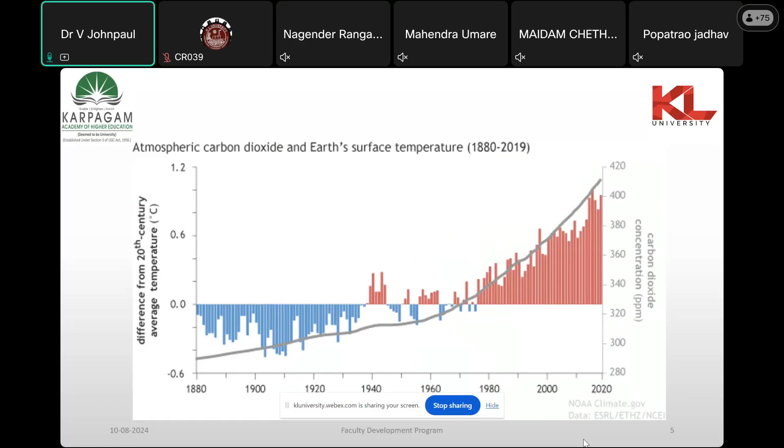These are some of the innovations and future directions which we are recently looking for: net zero energy buildings, circular economy approaches, biophilic designs, advanced materials and technologies, smart buildings and IoT integrations. This fifth one, smart building IoT integrations, is the recent one we started to implement in civil engineering also, like using drones or sensors for health monitoring, etc.

Based on this, Indian specific initiatives have organized Indian Green Building Council, IGBC, Indian Energy Conservation Building Code, ECBC, and Sustainable Habitat Mission. Then green rating for integrated habitat assessment.

So what is meant by green buildings? It refers to a structure that is environmentally responsible and resource efficient. That is very important. It has to be both environmentally responsible and resource efficient.

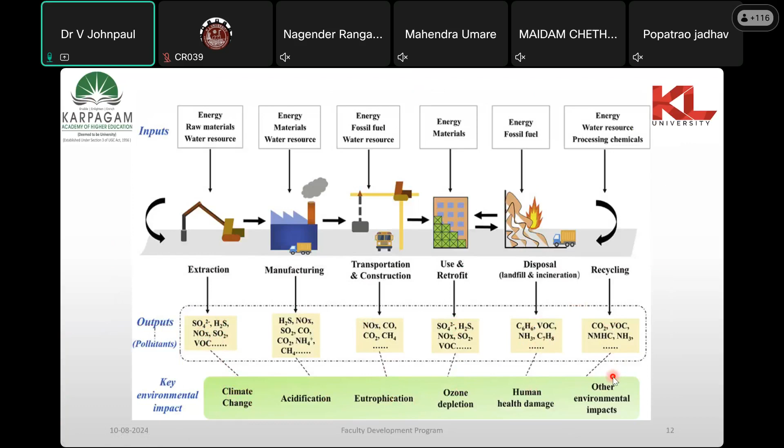That's why we are looking into green building materials, which are a perfect alternative to traditional concrete materials.

We need to optimize material usage to equivalent standard dimensions, and minimize wastage through the waste management hierarchy. Using prefabricated components like precast structures, we can minimize a lot of waste since it's manufactured within the industries.

We need to plan reuse with future deconstruction in mind to facilitate the reuse of materials. As the sir mentioned in the morning session about prefab structures, you can reuse them anytime, unlike concrete structures where we need to demolish and dismantle, causing huge loss in materials and money. Whereas in prefab structures, we can go for modifications, extensions, or replace the structures in other places.

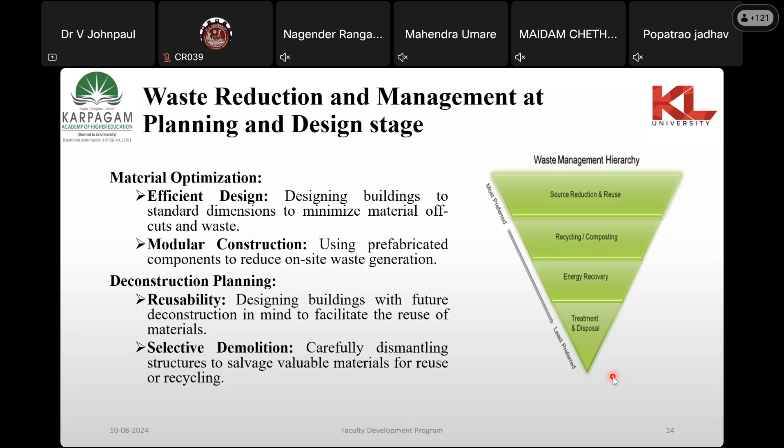These are the certifications and standards for sustainable buildings currently available worldwide. You can get rankings for a green building or sustainable building concept based on energy consumption and carbon emissions. They give ranking systems, especially in India or abroad.

LEED, Leadership in Energy and Environmental Design, has been recognized as a green building council certification in three categories: silver, gold, platinum, under each category covering energy, sustainable sites, water efficiency, materials, indoor quality, and design innovations. In sustainable construction practice, life cycle assessment of the building is very important.

Rather than just talking about sustainable building practices, we are not calculating the life cycle assessment of buildings. I've heard many say that since a metal is going to waste, they incorporate it into the concrete and call it green concrete because they've used waste. But it's not like that - we need to assess the life cycle of the building.

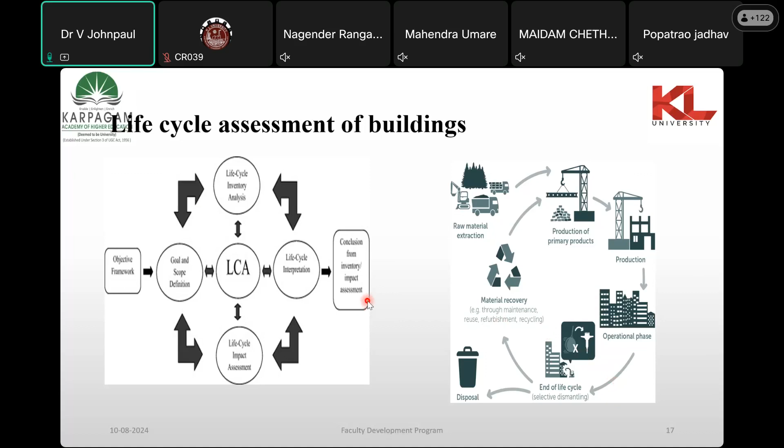So before using any waste material in concrete, you should do the life cycle assessment of that particular building material. That is very important.

There are other standards for sustainable building measurements, such as the international standard for environmental management systems developed by the International Organization for Standardization, and certifications involved in construction. Their focus is to reduce environmental impact and improve environmental performance through systematic management.

These are some of the buildings constructed around the world as sustainable construction projects. The Edge, located in Netherlands, is known for cutting-edge sustainable features and smart technologies. It uses energy efficiency techniques by combining solar panels and energy efficiency systems to achieve high level of energy performance. In India also, we have started to use solar panels.

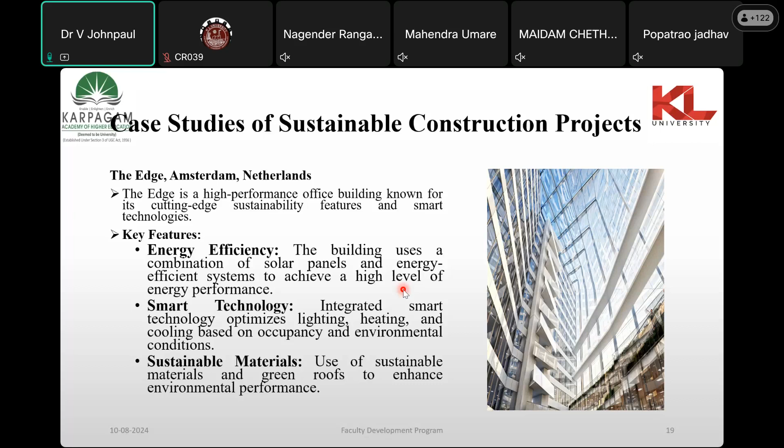Central governments have started to give many plans and schemes to conserve energy. The smart technology they have implemented optimizes lighting, heating, and cooling based on occupancy and environmental conditions. They also use green roofs to enhance environmental performance.

Another example is One Central Park, the building located in Sydney, Australia. It features green walls, and the towers use large vertical garden designs. It was designed by architect Patrick, contributing to improved air quality and aesthetics. Due to the hanging gardens on the wall, they get fresh air.

It also has sustainable design through energy efficient systems, water recycling, and sustainable materials. Even for flushing toilets, a huge amount of water gets drained, even fresh water. For that, we can go for recycled water, which they have adapted in the One Central Park building.

For community integration, the development includes public green spaces and amenities to enhance community interactions. The Green Star has been given by the rating systems to showcase the integration of green infrastructure in high density urban environments.

Now we'll come back to the materials which I have mentioned in the title further, which I have used for my research also. GGBFS, ground granulated blast furnace slag, is produced during the process of iron ore processing. This is one of the byproducts.

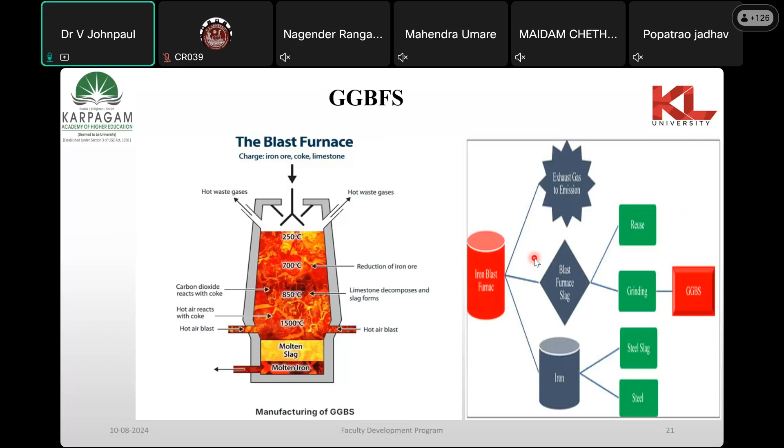It uses iron ore, coke, limestone, which decomposes at 850 degrees Celsius. Carbon dioxide reacts with the coke.

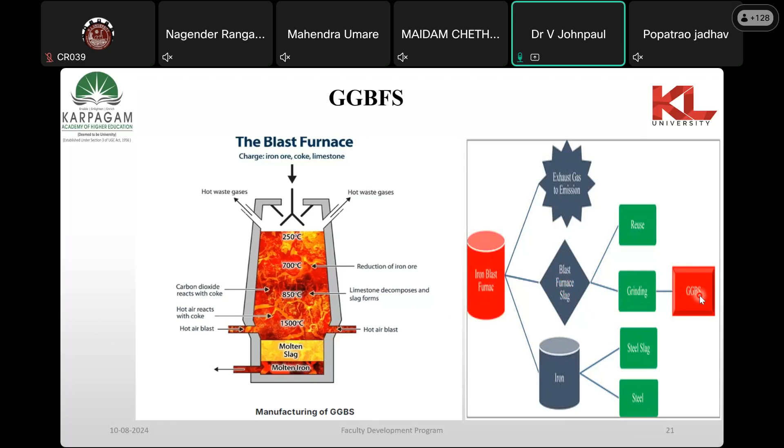These are the chemical compositions of GGBS slag, which slightly vary depending on the composition of raw materials in the iron production process. If you go for Tata Steel plant, the calcium oxide may vary, silica may vary. If you go for JSW, the percentage of chemical composition varies. For that, there is a provision of a code book which I'll show you.

This is the code book, IS 16714:2018. This is the general requirement given by IS codes in table 1, chemical requirement of GGBS. For manganese oxide, MnO, maximum should be 5.5% by mass. The test method is IS 4032.

Magnesium oxide has to be 17% by mass. Loss on ignition has to be 3%. Chloride content, which causes corrosion in the steel, has to be less than 0.1%. Insoluble residue 3%. These are the percentages required as chemical requirements for GGBS.

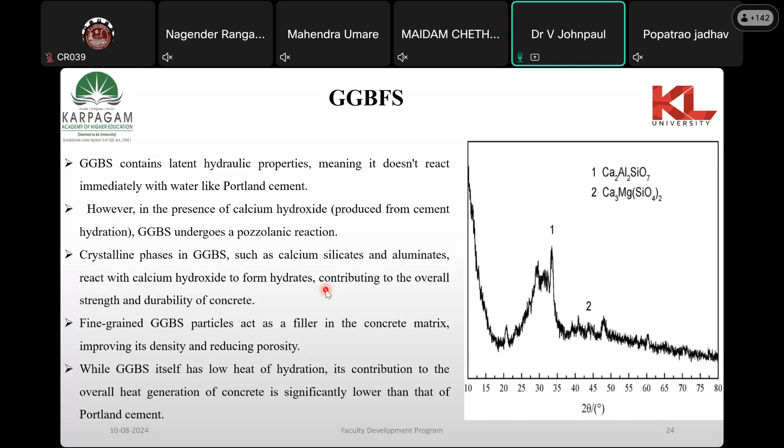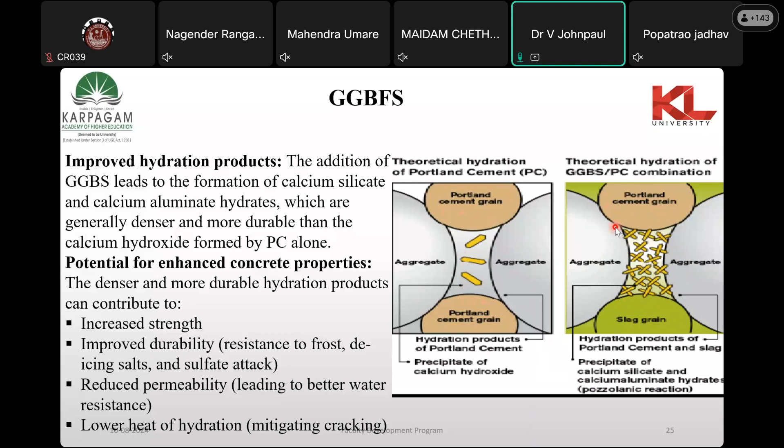Due to the improved hydration reactions, this formation happens in the concrete. If you look into the normal concrete on the left side, there will be porosity. If the porosity is connected, there will be points where water or air can penetrate. If it is RCC, there is a chance for durability constraints because it starts to corrode due to the penetration of air and water.

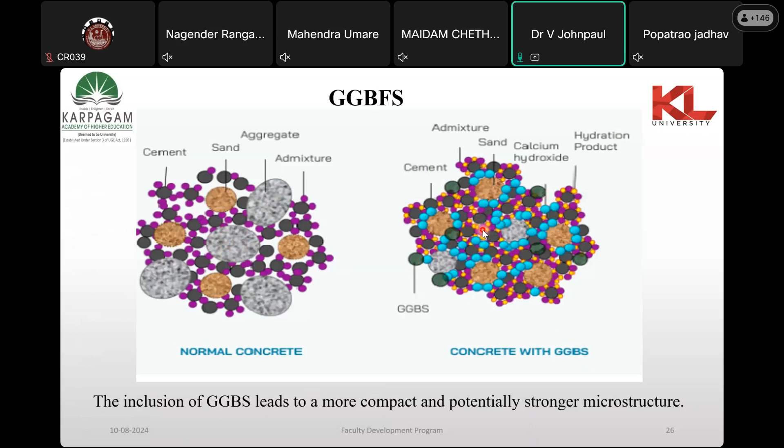And if you look into the picture of concrete with GGBS, there is a closely packed ITZ, interfacial transition zone, because of the hydration products formed during the hydration process. So it's a strong bond.

Now, carbon dioxide capture in fine aggregate GGBS. Mostly in GGBS, I have done research as a replacement for fine aggregate, and also as a replacement for cement.

So due to this, the pozzolanic reactions will be less, and shrinkage cracks will be less. In the long run, like what I said before about life cycle assessment, this provides better solutions compared to other things.

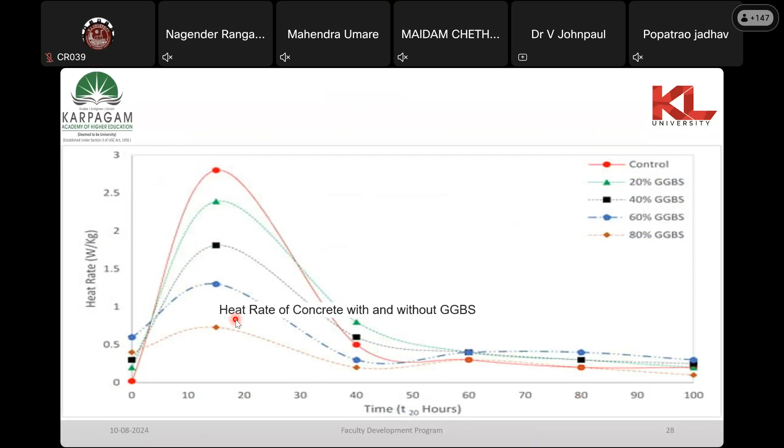Then, looking at curing age and normalized heat flow - if you look into this also, GGBS with curing results in heat flow that is very less compared to the normal.

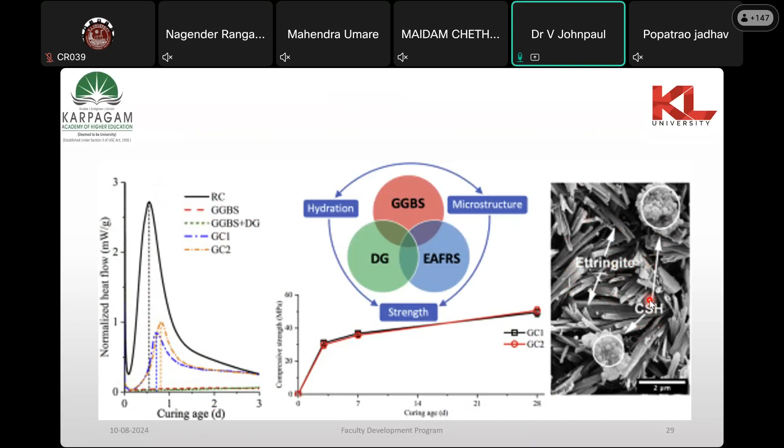Just look into the images - there is a formation of ettringite and CSH, calcium silicate hydrate. You can see through the images. In the next picture, I'll show you clearly: the left one is normal, that is like if you take M20, 1 is to 1.5 is to 3, with 1.5 part fine aggregate and 3 parts coarse aggregate.

Along with this is GGBS incorporated concrete. You can see the formation of ettringite, and you can clearly see the formation of CSH. There is a close bonding between the paste and the aggregate formed during the hydration process. In the long run, this poses benefits - we can reduce landfilling as well as concrete production materials too.

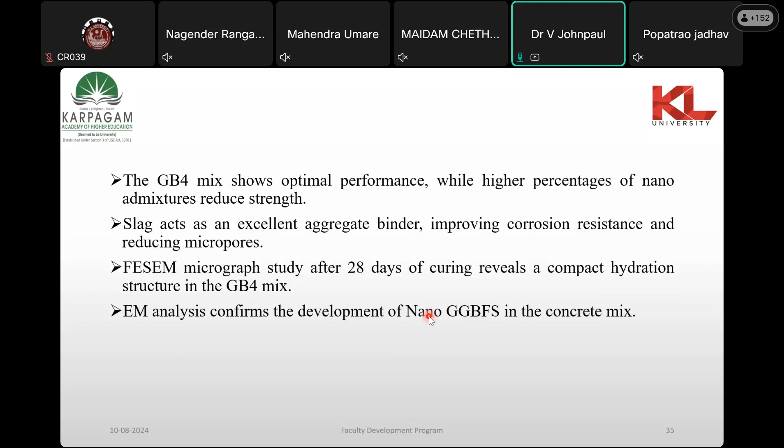Which we have seen, slag acts as an excellent aggregate binder, improving corrosion resistance and reducing micropores. Even many cement companies have now started research on water repellent concrete techniques, even denser than this. Many people have started to research on this so that it reveals a compact hydration structure in the mix, like FESEM, which gives you a clearer image, as you have seen. It confirms the development of nano GGBS.

Leadership in Energy and Environmental Design recognizes GGBFS in concrete as a sustainable practice. Using GGBS can earn LEED points by improving project sustainability. It gives you the green rating, promotes sustainability, improving living conditions and resource management. Construction is crucial for progress, impacting social and economic factors.

Due to urbanization and industrial growth, increasing recycling and waste management challenges, GGBS is beneficial for high quality cement, mortar, and cement production. So these are the major advantages of using GGBS: it has high workability, reduces bleeding, reduced permeability, and chloride resistance, which is very important for RCC so there will be reduced chance of corrosion in the concrete.

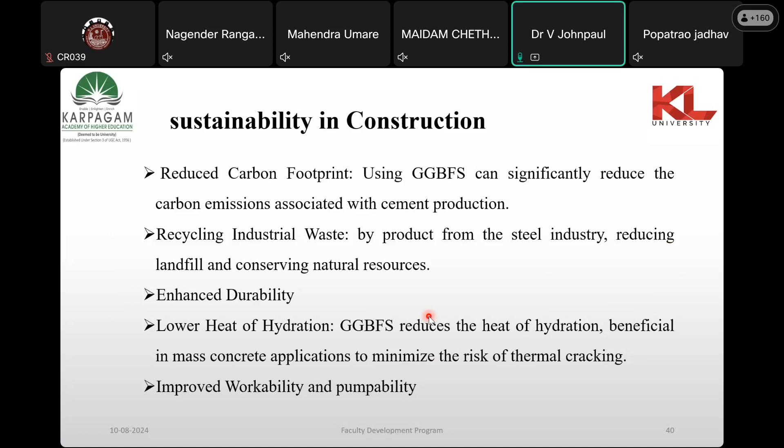It will also enhance durability and reduce the heat of hydration, which is beneficial for mass concrete applications. There is a chance of thermal cracking, like shrinkage in mass concrete, which can be reduced using this kind of pozzolanic activity material, along with improved workability and pumpability in the concrete.

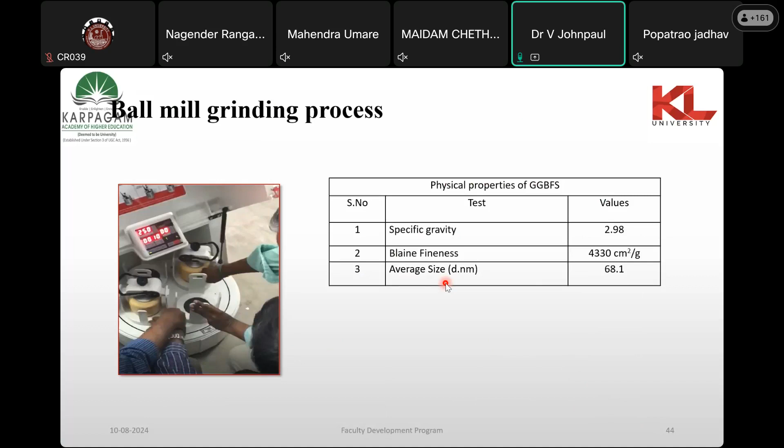This is the fresh properties of concrete. This GB1, GB2 and all mentions the mix type which have been added.

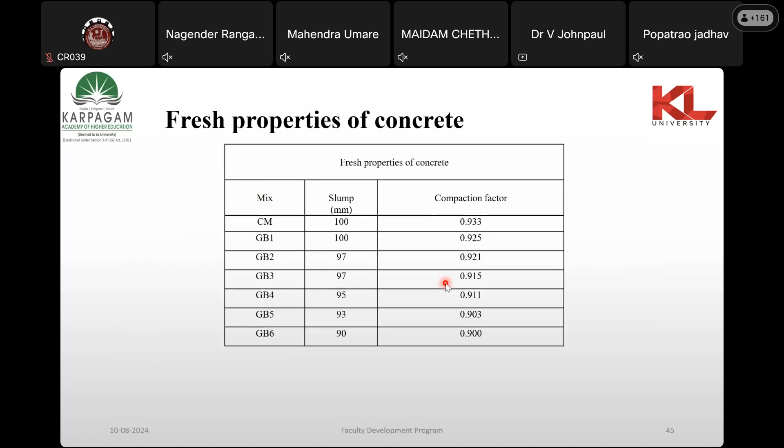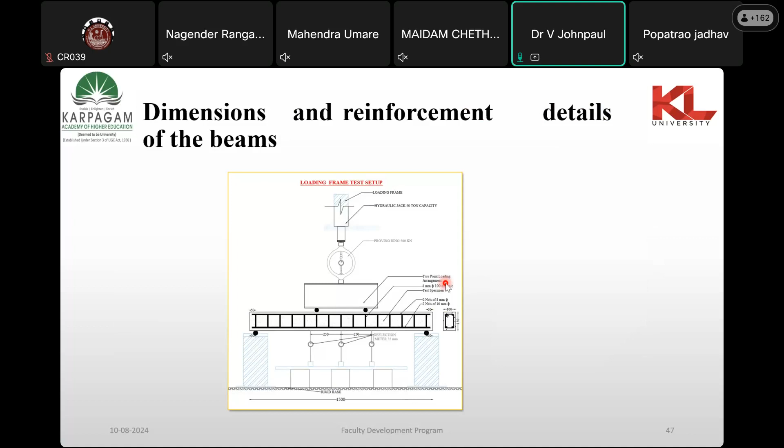Then coming back to the reinforcement details of the beam, which have been 2 numbers of 8 dia at the top and 2 numbers of 10 dia at the bottom, has been cast and tested with different GGBS based different mixes using a loading frame, hydraulic jack of capacity 50 tons, loading frame of capacity 100 tons, and proving ring of 500 kN with 3 jacks at the bottom. One is L by 2, L by 3, and L by 4 with simply supported support connections.

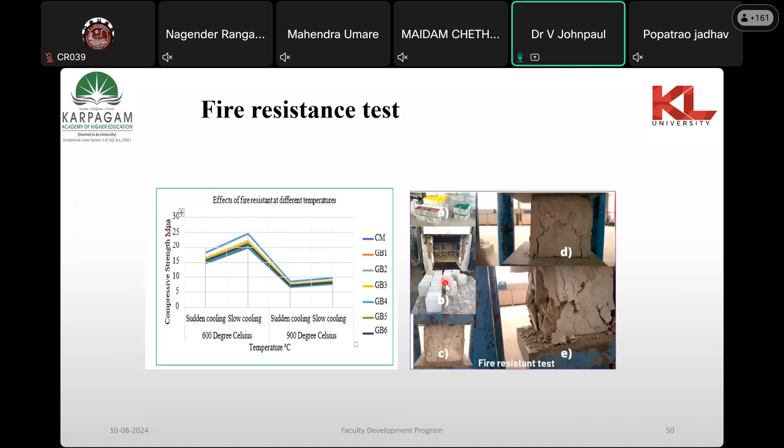The compressive strength, then this is the fire resistance test, which happened to be done for the control mix and the GGBS based mix. Both almost exhibit similar type of properties, but even after going up to 900 degrees Celsius in the oven, it exhibits good strength capacity compared to control mix.

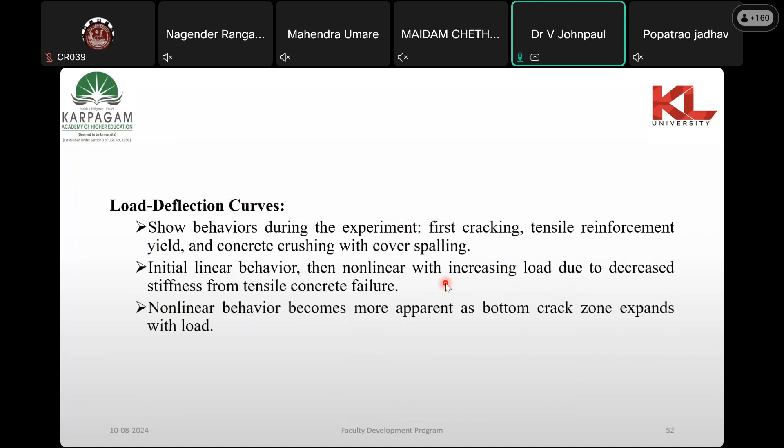And these are the tests which have been done. It forms load deflection curves and absorbs more energy in the GGBS based beams.

More number of structural cracks in control beams have been found out compared to nano GGBS based. As the GGBS based has more bonding between materials, it's not showing the micro cracks.

So, like what you have seen in the previous things, now it's moving towards the role of artificial intelligence in sustainable constructions.

So the role of AI and ML in sustainable communities. Whatever methods we are practicing traditionally and incorporating sustainable building materials, nowadays in the civil industry itself, the role of artificial intelligence and machine learning plays a very important role in measuring wastages and helping in energy management, thermal comfort, power, cooling, circulation and automation, all within the indoor environment.